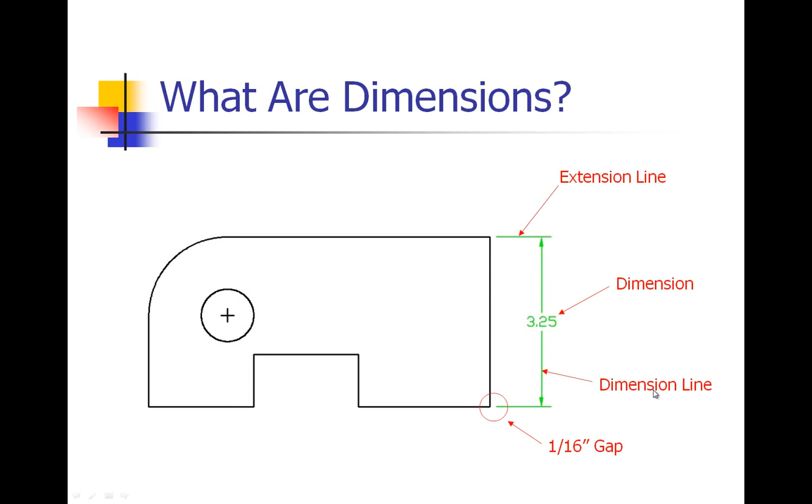So we're going to go through a few of the rules for dimensioning the type of drawings that we're going to be doing throughout this course. First off, dimension lines must be kept at least 3/8 of an inch from the object and at least 1/4 inch from each other. And this is for aesthetics and readability. You want to make sure this first line of dimensions is far enough away from the part that you can clearly read them and that they are not crowding the part.

Additionally, the second tier of dimensions need to be a decent distance away, but not so far that it looks weird. We want this to look aesthetically pleasing, but we also want it to be easy to read. Now, nobody's actually going to put a ruler on there and measure the distance that you are away from it. You can take a look at it and say, yeah, that looks pretty good, or yeah, something looks a little goofy with that.

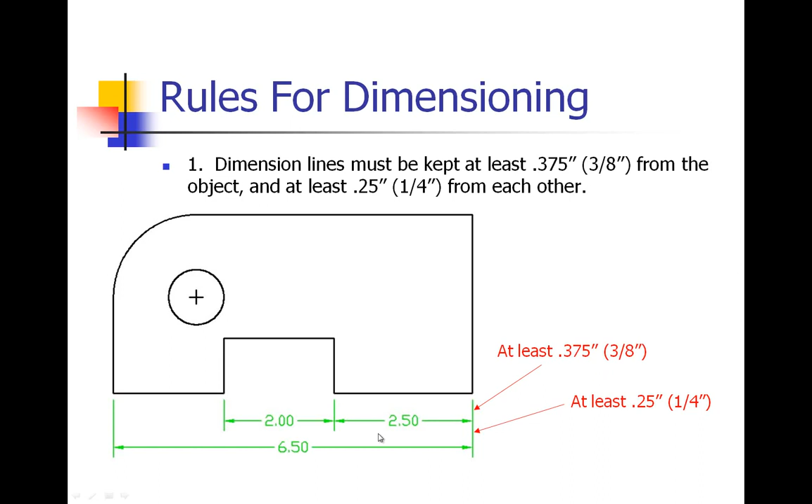Number 2, on machine drawings, which are mechanical type drawings, those are the drawings that we're doing in this course. Dimensions should be kept in decimal inches or millimeters if you're working in millimeters. Values are given to the second decimal place, except where greater accuracy is required.

If you're doing a drawing that you need to go to the thousandths or ten-thousandths, you need to give that information. For what we do in this class, we are focusing on 2 decimal places. That is accurate enough. So as you can see here, we have a dimension that is in decimal inches, 2.50, and we have 2 places after the decimal.

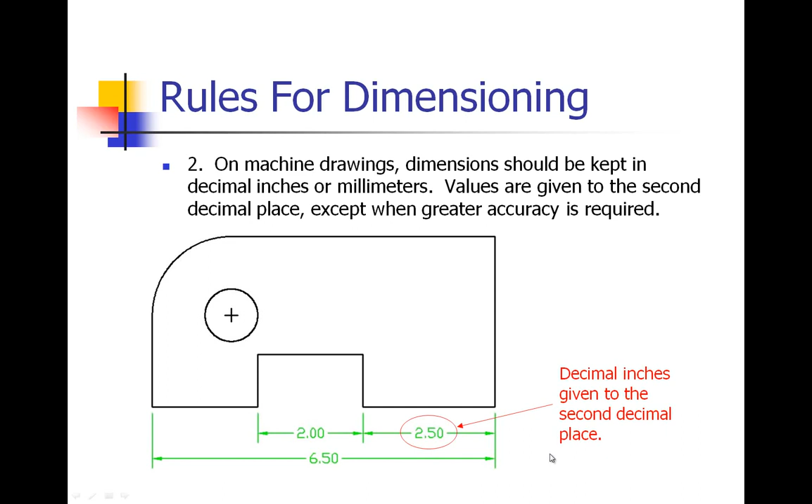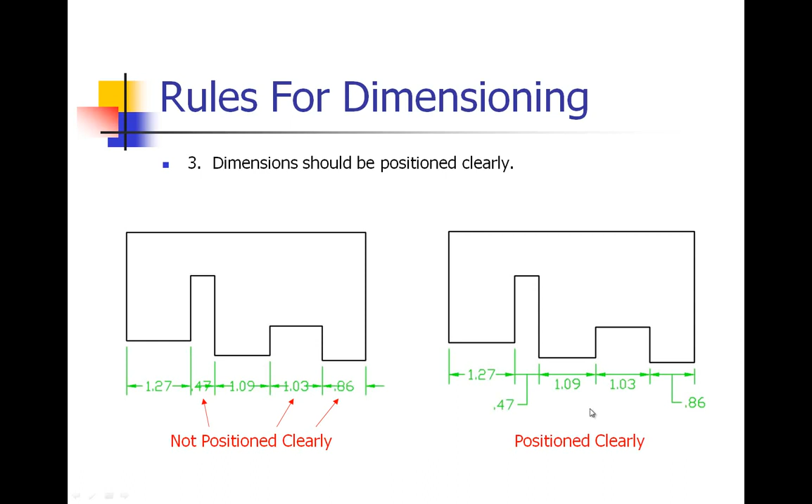Number 3, dimensions should be positioned clearly. If you have a case like this, where we have a lot of dimensions, sometimes the dimension lines will overlap on top of the actual dimensions. What we need to do is modify those dimensions and pull some of those numbers out. So again, it is readable, but it is also aesthetically pleasing. And we'll show you how to do that once we start practicing putting these dimensions on. So they need to be positioned clearly.

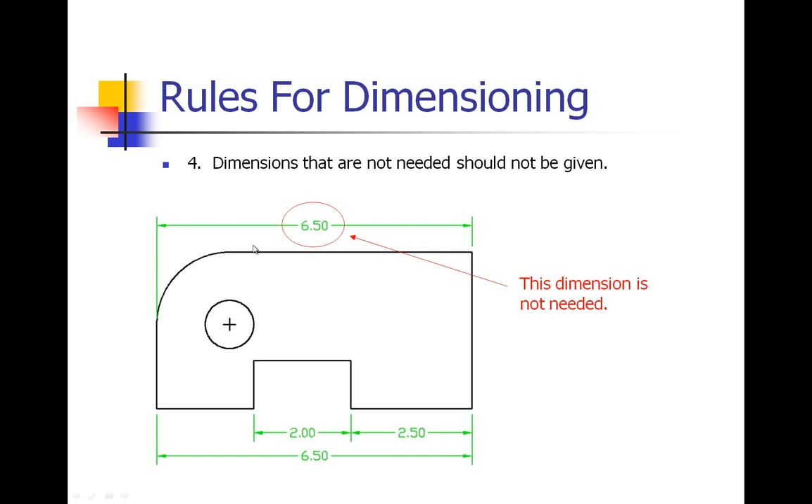Number 4, dimensions that are not needed should not be given. And again, this is for aesthetics and readability. We don't want a whole bunch of dimensions around here that we don't even need, because it crowds the drawing and it makes it look not very good. So with this particular one, 6.50, I already have that measurement down here at the bottom. So I don't need to put that measurement again, because I know that my measurement at the top should be the exact same as the measurement at the bottom.

Number 5, overall dimensioning should be placed outside of the smaller dimensions. So, for example, on this drawing here, our overall dimension of 6.50 inches is on the outside of these smaller dimensions. On this shape on the right here, our 4.04, that is outside of this row of smaller dimensions.

Now, when you do use the overall dimension, one of the smaller ones should be eliminated. So for this 6.50, we don't need to put all 3 of those smaller dimensions, because we can do just a little bit of math to figure out the last one. So if we took out this 2 inches, we could just take 6.50 and subtract 2.50 and 2 to get the last measurement. Now, that is unless it is needed for a reference, and in that case it should be put in brackets over here.

So we have an overall dimension of 4.04, and because there are so many little stair steps here, it would take a significant amount of time to calculate this, so it is faster to just put that last little dimension in there and put that in some brackets, and that will help the machinist, or whoever is manufacturing this part.

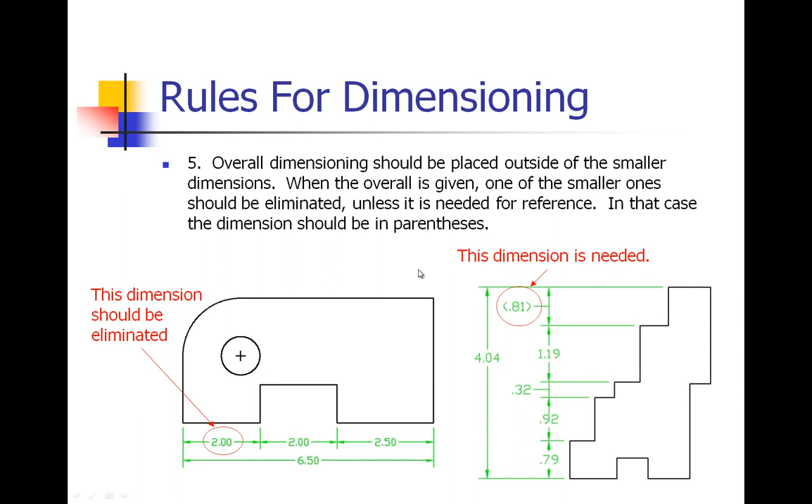Number 6, on a part with a circular end, you should dimension to the center line. So we put our center mark in, and we have a little gap there, and we should dimension to the center line. So we would have to delete out that little piece of center line and go right to that center mark. And then the other end of that obviously is going to the top of the part, and that will help you place the circle. So we know that the center point of that circle is 1.50 inches down.

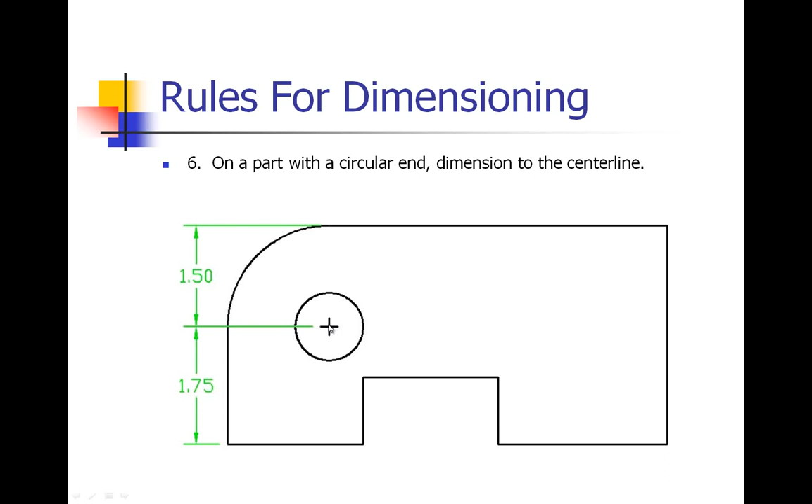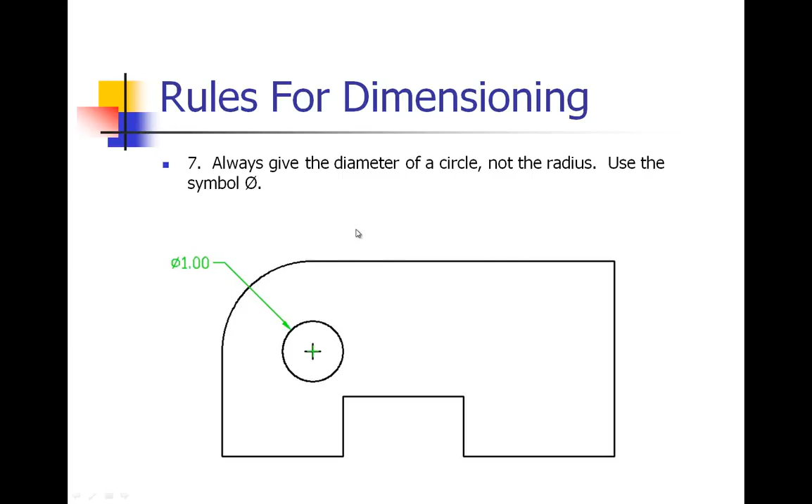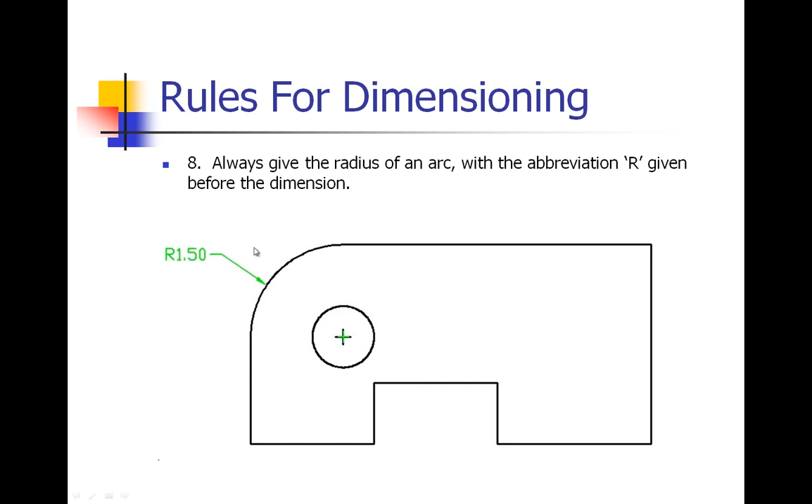Number 8, always give the radius of an arc with the abbreviation R, R standing for radius, given before the dimension. So here we are giving a dimension for this arc, which is not a complete circle. It's a small piece of a circle. Because it is not a full circle, we want to use a radius measurement.

Number 9, don't place diameter dimensions in the shaded area. So if we have a part that has a shaded area, you don't want your dimension to be on top of that area, because then it would be very difficult to read. And again, that is more for aesthetics and readability than anything else.

Now, I don't know what the rest of this part looks like, but it may be better to actually do a diameter measurement coming off of the side of the circle rather than right on top of the circle. It all varies on what the rest of the part looks like. Even with this 45 degrees, we don't want that inside of here on top of this shaded area, because it would be too hard to read.

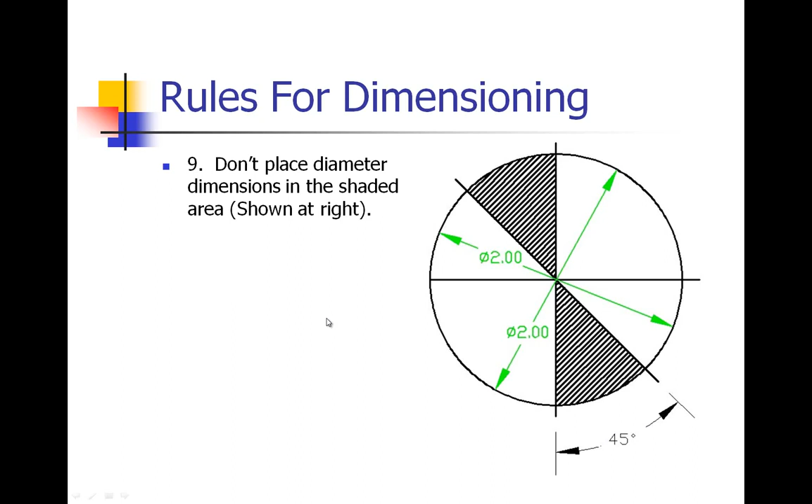Number 10, do not use a center line or a part of an object as a dimension line. So on this particular one, we are using the center line as our dimension line. You don't want to do that. Right down here, we are using an object line as the dimension line, and we don't want to do that because it's not very clear. On this part, it even looks like part of our line is missing.

The correct way to do that would be to pull those measurements outside of our part. So we have a little gap here, a little 16th inch gap. We've pulled that measurement outside of our part. It makes it much easier to read.

This one down here, again, we are no longer using the object line. Instead, we've pulled that measurement down, and we have our little gap there. We have our extension lines, our dimension lines, and our dimension. Our dimension is outside of our part. It makes it very easy to read, and it looks very clean.

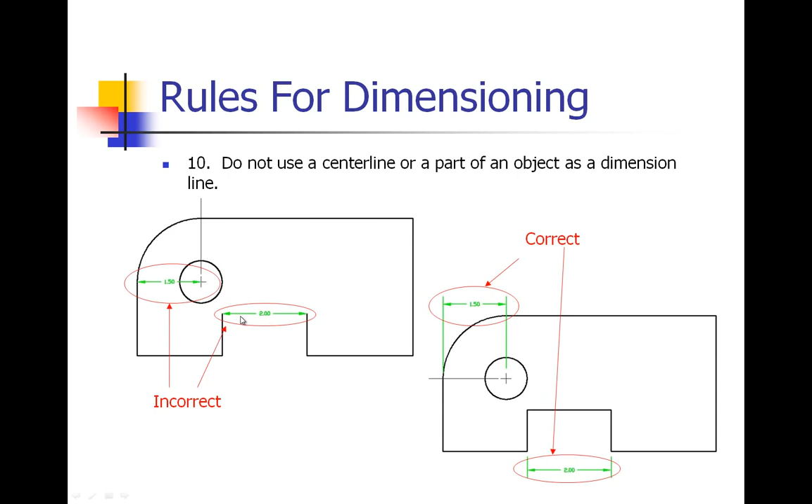Number 11, do not use an object line as an extension line. Now I'm going to jump back to number 10. This one was talking about using object lines as dimension lines. Now if you recall, a dimension line is the line with the arrowhead. Number 11, we're talking about not using the object line as an extension line. The extension lines were the little lines extending out beyond our object.

So we have here this arrowhead is pointing to an object line rather than an extension line. We would want to pull that dimension probably off to the left of our drawing and have this outside of the part and have an extension line on each side.

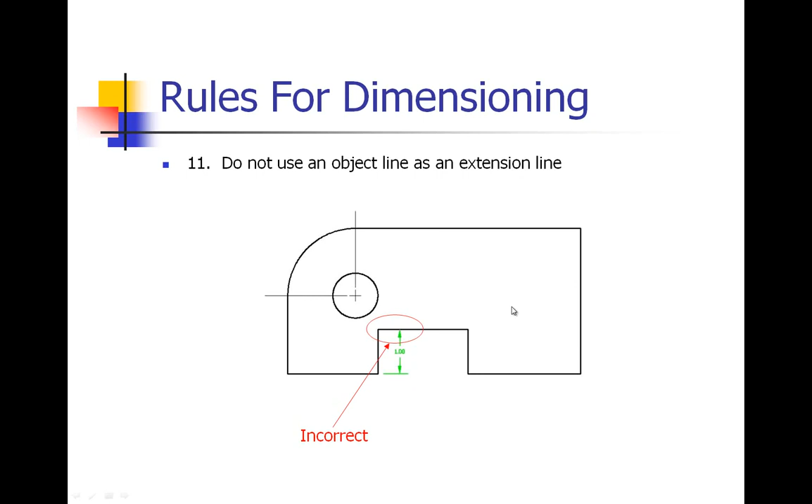Now as we progress with these future drawings, we're going to be able to utilize these rules for dimensioning and get a little bit of practice to help us dimension these correctly and make our drawings a little bit more complete than the previous ones that we've done.